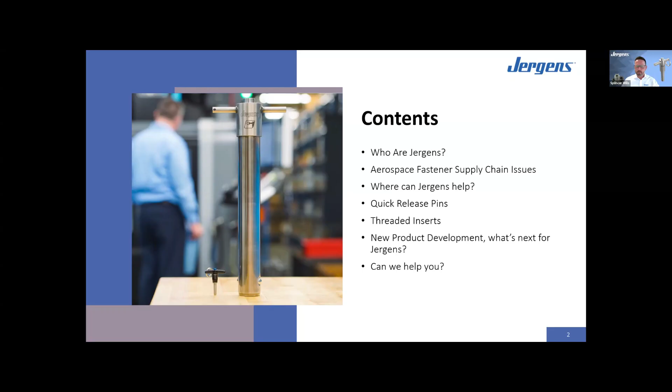I'll be very grateful for any feedback from anybody having experience right now with fasteners in the supply chain. Jergens is looking to focus on developing the fastener range for the aerospace market, and to do that we need to do it in conjunction with our customers and the challenges they're facing.

So first, a quick introduction. My name's Spencer, I'm based in the UK. I'm the European Managing Director, but I'm supporting Jergens on an international level in regards to building the aerospace market, particularly around the fastener product. I've been with the company now for just over 2 years. My background is in aerospace and defense, both from a distribution and a manufacturer point of view, and I've got a lot of experience in this market sector.

My colleague Miguel is based in Mexico. He's been with the company a little longer than me, 2 years 10 months. His background is from the automotive industry, special steels, and manufacturing processes. In conjunction with myself, Miguel is also focused on growing the aerospace business.

A little bit of information about the business, if you don't know who Jergens are. Jergens is a privately owned, family-run business, owned and operated by the Schrom family. The business was started in 1942, so it's a very well-established US business, over 80 years in business, headquartered in Cleveland, Ohio.

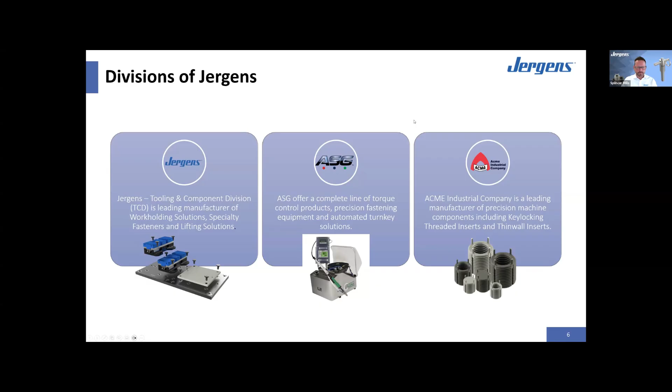Just as a bit of background about some of the other products before we talk about the aerospace market - I mentioned work holding. This is actually the biggest product group for Jergens on a global basis, and we also supply these into aerospace manufacturing companies. These are predominantly quick change systems, work holding systems for use in CNC machining centers, 5-axis machining centers, or any type of automated production facility where you need the ability to change components very quickly.

We do a wide range of products, from our ball locking system, which offers a complete solution for changing out components, jigs and fixtures, to Quick-Loc systems, 0-point systems, self-centering vices, power work holding, tooling columns, toggle clamps, and locating components. It's a very well-established portfolio of products in the work holding range.

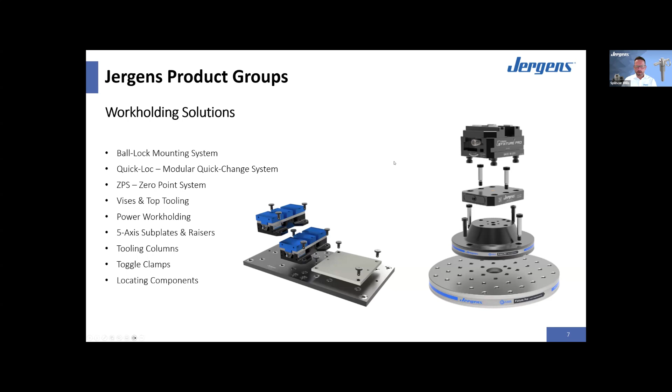On the specialty fastener side, we have Kwik-Lok quick release pins, which we'll talk about in more detail shortly, lanyards, key locking threaded inserts, spring plungers, handles, levers and cranks, and hand wheels and knobs.

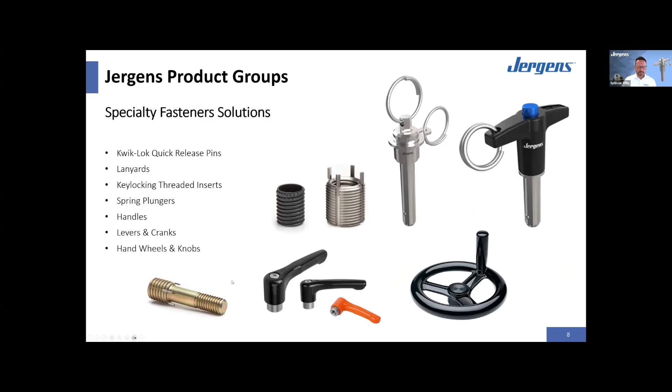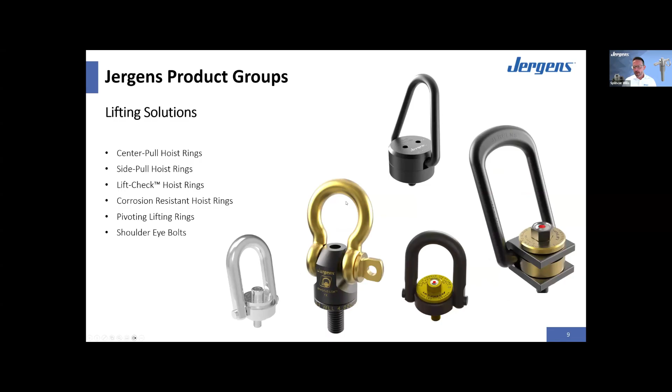We also have lifting solutions, which is predominantly hoist ring solutions, all different variants of hoist rings including corrosion resistant for harsh environments, but also our unique lift check system. These are actually used in the aerospace industry on some ground handling equipment, but also on some aircraft, particularly military cargo type aircraft.

So moving on to the aerospace supply chain issues. Ever since COVID, a number of aerospace fastener manufacturers have struggled to rebound. We all saw the aerospace market pretty much came to a standstill during COVID, and then once COVID passed, things quickly ramped up in regards to production demands. We can see the backlogs with the likes of Airbus, who've got 10 plus year backlogs on the order books now, and this is obviously being cascaded down through the supply chain.

And it's hit a number of fastener manufacturers due to a number of reasons. One key reason is during COVID, they lost a number of key and experienced staff members, whether that was through early retirement or other reasons. During that time, we obviously saw a huge increase in raw material costs, material shortages throughout the world, particularly with some stainless steels.

And then since COVID, it's pretty much universal across all regions - we've seen companies are now having recruitment issues. You cannot find skilled or qualified staff, and that really has affected a number of fastener companies. From our close relationship with our customers, end users, and distribution networks, we've managed to gain a lot of market knowledge. We're very keen to make sure we're very close to the market, so we know what's happening and where the challenges are, so we can react and help solve those issues customers are having.

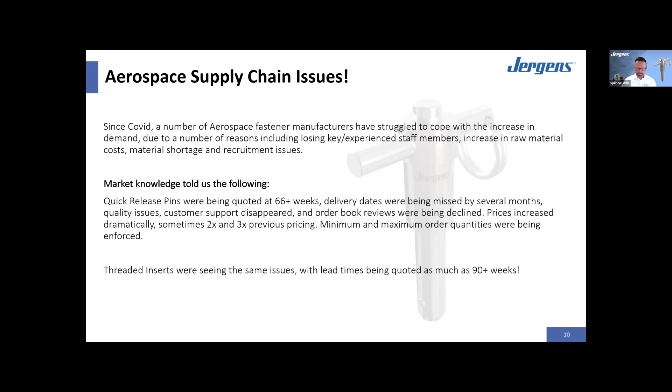Jergens quickly identified this as an opportunity, and certainly when I joined the business over 2 years ago, Jergens had already identified these issues and were working against this. I found similar issues were being faced in the US market, the UK and Europe. I did a lot of market research, presented the information back to the business, and we made a strategic decision that we needed to invest to potentially take this business from our competitors and make sure that we provide a product that's of high quality, short lead times, and market leading pricing.

So we've invested heavily into our raw materials and our staffing. Staffing is very important to Jergens. Being a family run and operated business, they look after the staff members like a family. And also our equipment.

Just in the last 2 years, we've invested over $2 million in production equipment for the quick release pins alone. That's on the back of the demand that we're seeing now on the order book, but also what we're forecasting. It's very important that we have these opportunities to present ourselves to the market, but also for the market to come back to us with information about potential demands, so we can plan ahead and make sure we're always offering a product that meets market demands. So we are set up very well for significant growth from where we are today, and we've already seen significant growth in the last few years.

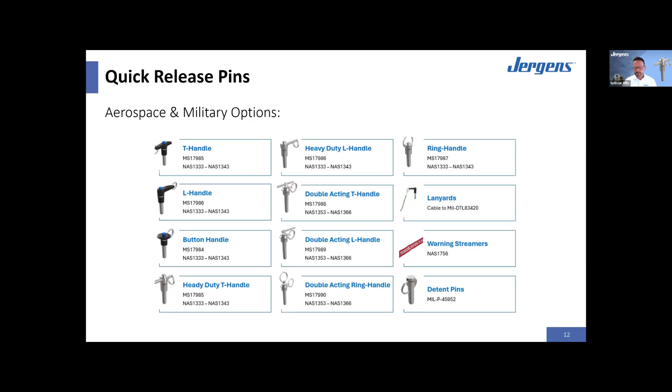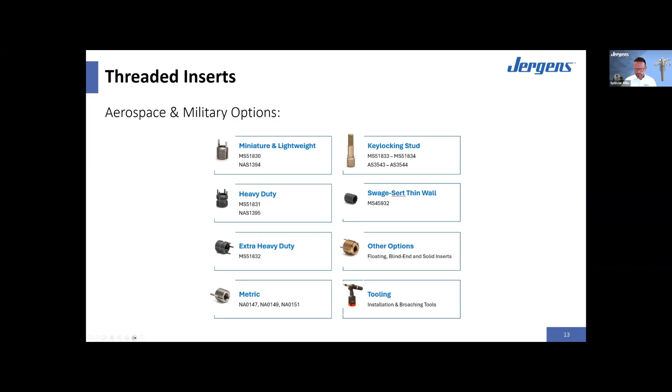The applications where these products are used - on the quick release pins, these are used across a wide spectrum of applications. You have ground support equipment, landing gear, aircraft seating, ejector seats, helicopter exhaust covers, gun and weapon mounts, modular armor systems, hatch and panel access.

And here are some photos of some real life applications. The first photo here on the top left, this is actually in NASA - one of their production facilities where they are using hoist rings and quick release pins for the transfer of some obviously very expensive space equipment.

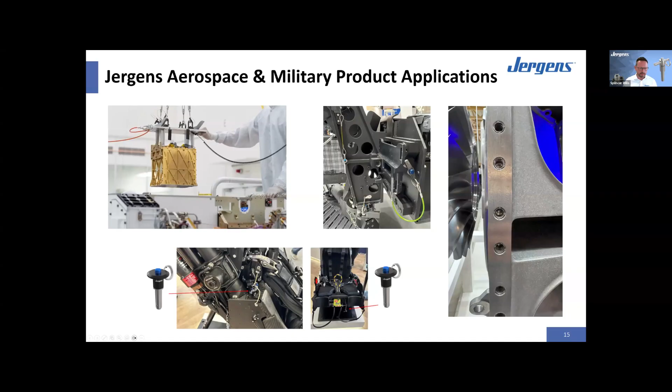I mentioned about new product development and what's next for Jergens. We're very keen to expand our range of fasteners, but we want to offer solutions to current issues in the marketplace. All of our new product development is based on issues in the marketplace, whether that's supply chain issues or application issues. We are very open to exploring all different options to help find a solution to these problems.

I mentioned the thin wall inserts. We are currently developing a range of thin wall inserts to AS 52760 to 63 and AS 52790 to 93. These are thin wall inserts used on aero engines. We've had a lot of feedback globally that the current marketplace is struggling to meet the demands, and we are going through the qualification phase with the SAE to launch a range of these inserts. I'm hoping we will be ready to launch these by the end of the year.

Similarly, quick release pins. We are developing a range of AS specification quick release pins. These are metric and don't actually require qualification by the SAE, so we are hoping to launch these very quickly. In fact, some of our existing metric pins already meet the AS qualification, so that will be something we'll be launching to market very, very soon.

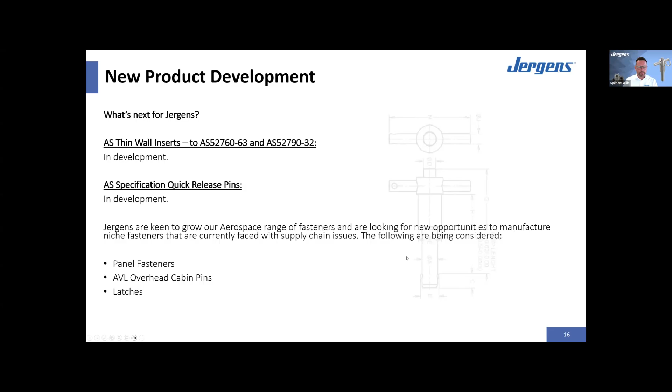So this is where I ask, how can Jergens help you? Are you experiencing any of the supply chain issues I mentioned? Do you have issues with quick release pins, threaded inserts, or any other fastener products? Please share any information you have on supply chain issues from the fastener range of products, and we will certainly be able to help you. If it's not something in our range, or it doesn't meet our criteria for new product development, I can help guide you toward somebody who could potentially help, drawing on my background and knowledge from the aerospace market.